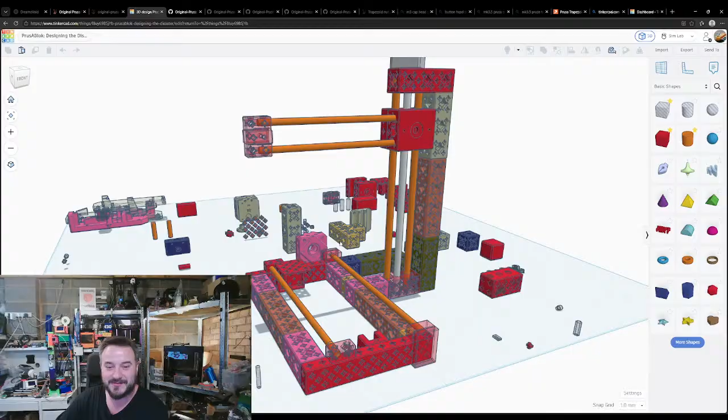Transition. There we go. Yes, there we go. So we did, as you said, horrible things. We now have something that resembles a Z carriage that should hold

also the X carriage, an X carriage end piece, and yes, it might not sound like much, but it's a reasonable amount.

Did I copy this and put it over there? No, I didn't. Let's put one over there.

So, we have got, in order of pieces, X carriage end, Z carriage front, rear, the Z top, the Z base,

a simple rod holder, a fancy rod holder, a Y motor mount, a Y idler, and a Y front and rear plate.

Those are the pieces that we've got, I think.

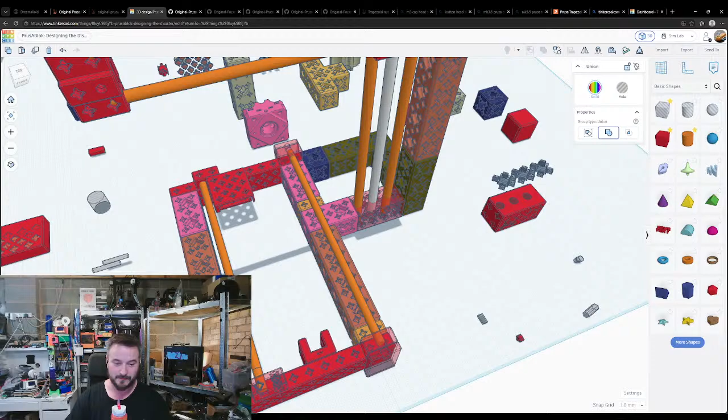It's warm. I don't like how warm it is, but it's warm. And on that note, don't forget to drink things when it's warm. Just don't forget to drink things. Or itch your nose, because my nose is itchy.

Your nose, not my nose. Okay? Okay?

Right. Yeah, I think we can jinx it and say, you know what, Thursday we can be printing things. Let's jinx it and say that.

I mean, to be fair, we could take the Y front and rear, print that.

The Y idler, the one I printed was incorrect, because let's make this mistake now and get it over and done with.

The Y idler, I didn't put the backing piece, the backstop in. So the hex nut will just fall through. Do I have a right-sized hex nut?

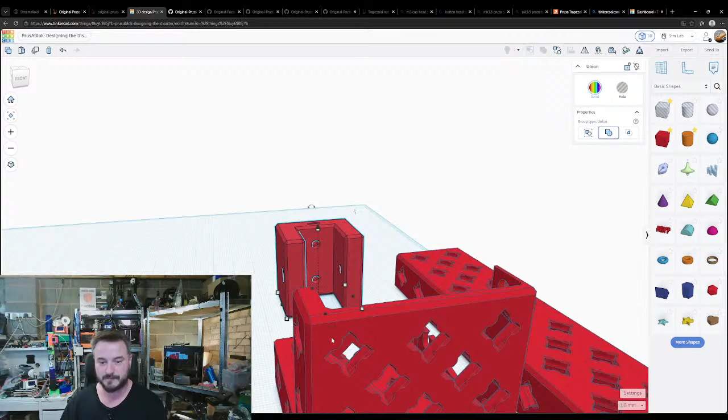So should we do that now? Shall we jinx ourselves and print the Y carriage pieces?

Yeah, I think we should do it. Let's do it. Let's do it.

Let's load up Prusa Slicer. And then let's transition so that y'all can see it too.

That is the wrong version of Prusa Slicer.

Let's try this version. For some reason, it loaded up 2.1. That's really old. I don't know how old 2.1 is, but that seems really old.

So let us load up Prusa Slicer.

And then let's do transform, fit to screen. Somewhere about there. Okay.

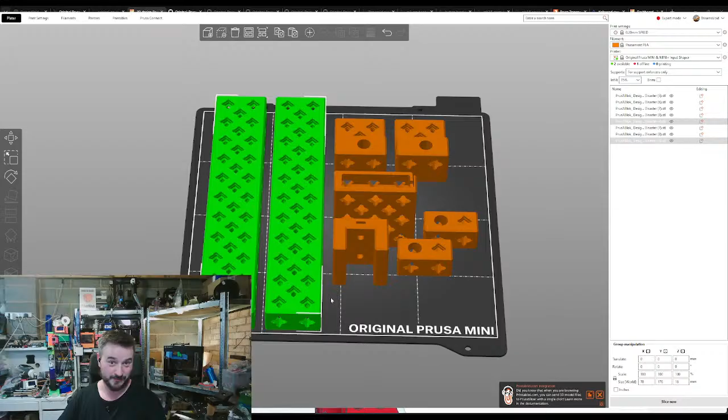In theory, this is the y-axis. In theory, we could slice this and it would be ready for Tuesday.

Let's see how long it takes. Let's take a gander. Viduko, hello. How are you doing?

Trying to install Debian on an old laptop to see how I like it over Mint. They are the same base, it all depends on how much polish you want on top.

10 hours, 10 and a half hours for this print.

Do we do it? 10 and a half hours. We'll have it for Tuesday.

I mean, to be fair, we don't need 10% infill. We do need 0.2, I like 2 layers. Go 3 shells, top and bottom. 3 shells, top and bottom, 10% infill. Not in grid, let's go adaptive, no, generic cubic.

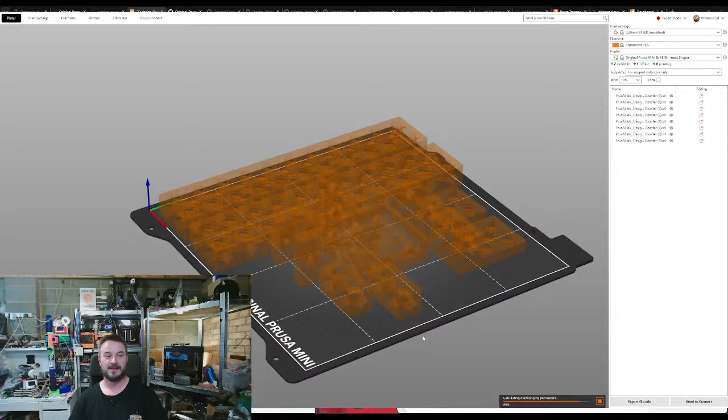I got mine in 2013, 2014, 4th gen i7. Annoyingly, it still works, annoyingly it still does reasonably well, to the point where I've rebuilt the 4th gen i7, and that is what is powering this live stream right now.

In fact, the same graphics card, an NVIDIA GTX 1050 Ti, and it's all doing this. Yes, it's currently running at 80 degrees, but hey, I'll tell you what.

I do not love downloading OS files from the internet. I'm going to have to see how difficult it is keeping a full offline ISO on hand, just in case civilization totally fails. That is a very reasonable approach, having Ventoy on a USB stick and a bunch of Linux ISOs. I mean, you can even do Windows within Ventoy to install that.

Do we do it? Can we add a brim? Can we add a brim in Prusa Slicer to just those objects?

Right, actually let's just select: Y idler, Y motor block, fancy rod holder - I guess I can't escape Linux talk even on others' streams. No, you can't. Simple rod holder, 11 by 2 block, fancy rod holder 2, simple rod holder 2, and then 11 by 2 block 2.

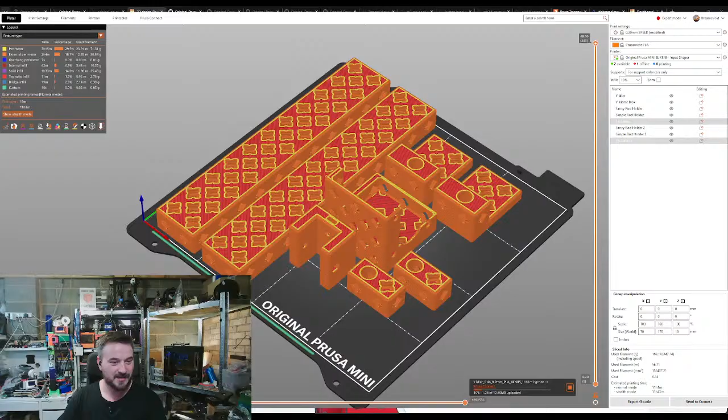And let's just do the do. Boom, there's the Prusa Mini, or what will be the PrusABlok. Let's just send it.

Downloading the G-code. No, I don't want to update, go away, don't make me update right now. Can I not skip?

There we are. Don't you love to see it? Don't you love it when your 3D printer prints parts for itself?

We'll check back in on that shortly. Did I actually orientate the motor block correctly? Yeah, that's fine, that's fine.

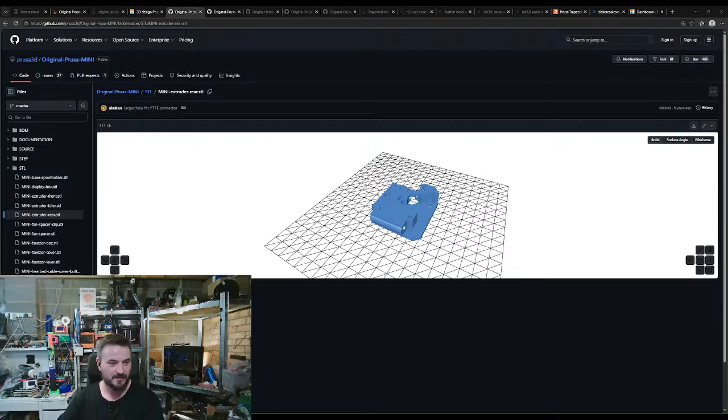I made the thumbnail, you know, this thing.

I broke the shot. Good job. For goodness sake. Yeah. Right, transition.

Right, back we go. I made the thumbnail in Photopea. It works. Just so I had the chop across thing, because I couldn't figure out initially within GIMP. I used GIMP previously, but I couldn't figure it out. And then just the text overlays, I do that on my phone. I hate that that's the answer I've got, but yeah.

All jokes aside, it seems like a fine OS. It just doesn't run hardly anything I use on a daily basis.

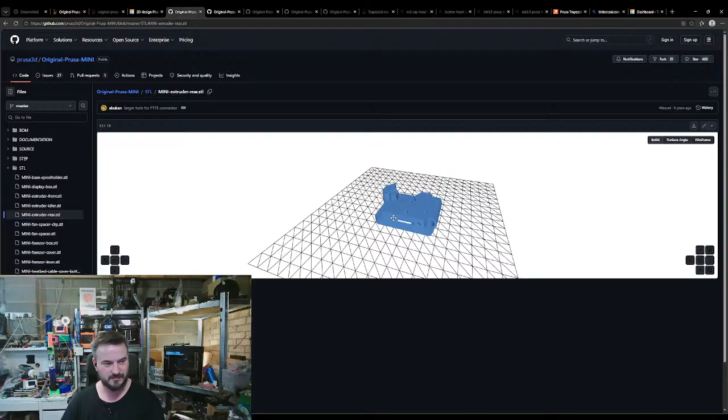Currently, it's an opt-in feature, but yeah. What did I say that you're agreeing with?

Move you there, move you there. Drag and drop, and align, align. Because...

Which side holds the NEMA 17? Which side holds the actual extruder? Oh no, I didn't mean to close you. I meant to duplicate and then go into Tinkercad.

So I can load up the pre-built model. Actually, why am I doing that? Why don't I just use the manual? Right, let's just use the manual, the manual makes sense. Right, you finish loading. Cool.

Extruder motor parts preparation, assembling the extruder. Extruder assembly parts preparation. That's the idler. Extruder front parts preparation. Okay.

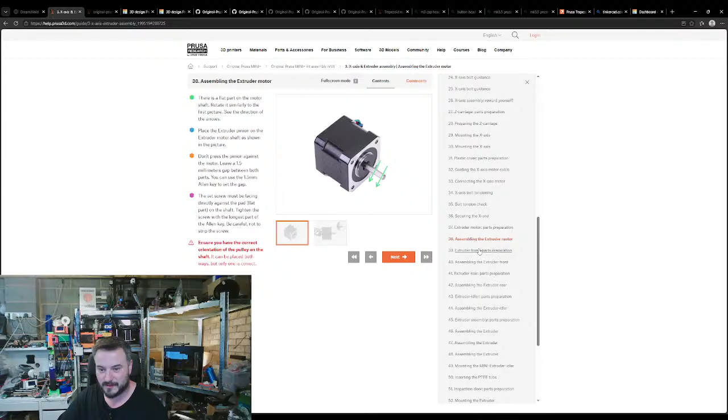So if that's the extruder front, extruder idler, assembling the extruder. Right. So is that extruder front? If extruder front holds the NEMA, then where's extruder rear?

Tinkercad, man, can you import a PNG as a reference image? Blender lets you. No. SVG? I can import an SVG.

Thing is, though, I'm trying to... You're not done, Slowpoke, Cragord. You've only just turned up. You're half an hour late.

And then place the bearings onto. So if that's... what part is that part? Mini extruder front, it says it right there. So I need mini extruder rear. So that's mini extruder front, that's mini extruder rear.

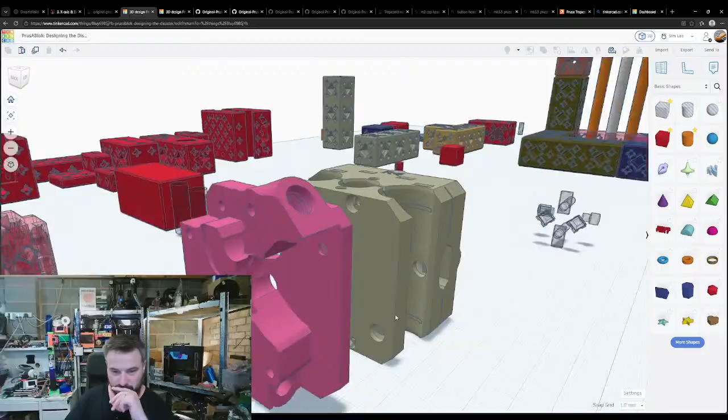You align centrally with this, please. Oh, hang on, that's upside down. There we go. That's not fair. Happy she kicks and bites. I mean...

Anyway, so extruder rear, that sits on there. And then extruder front sits on there. And then, oh yeah, that's the cable management piece. And then extruder idler.

I'm not echoing. I don't think I can echo that one, Joe. I don't think I can. Or should I say, I don't think I should? You know what, that crossed the line. No, it didn't cross the line. It's fine, it's fine, I'm just being safe for work, even though it's currently Thursday and it's past work hours for people.

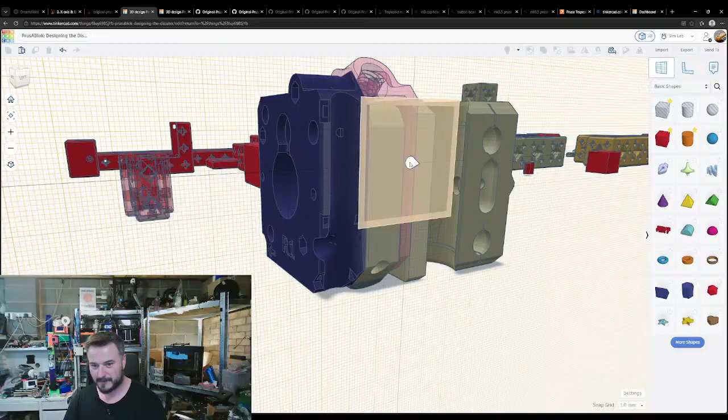Okay, so if that's roughly the stock extruder assembly, right? Can we agree? Do we agree? Roughly the stock extruder assembly, sans all the motors and gears and what have you. What do we think? It looks about right. Kind of, mostly.

Because I've got a genius idea, and you're going to love this. I think you're all going to enjoy this quite a lot. I think, to be brute, I think, and hear me out on this, I think that I can't be asked. I cannot be bothered to remake it entirely.

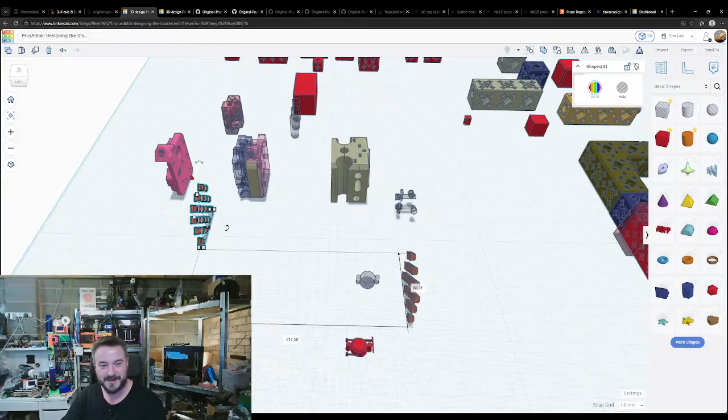However, we can take this piece and do something clever, because there's a nice flat surface here that we can see. And I think that we can just take the pile of connectors that's here. We can shuffle it over here. We can...

Rotate, get confused as to where they came from. And then just do a little bit of that, a little bit of that, and be done with it. Because why break what supposedly works, you know? Why break it?

Because, not being funny, the idea of remaking all of that geometry just doesn't seem like fun. But what we can do is thicken up this plate, thicken it up a little bit. Yeah, just add a bit more girth to make sure that we're not protruding the connectors through.

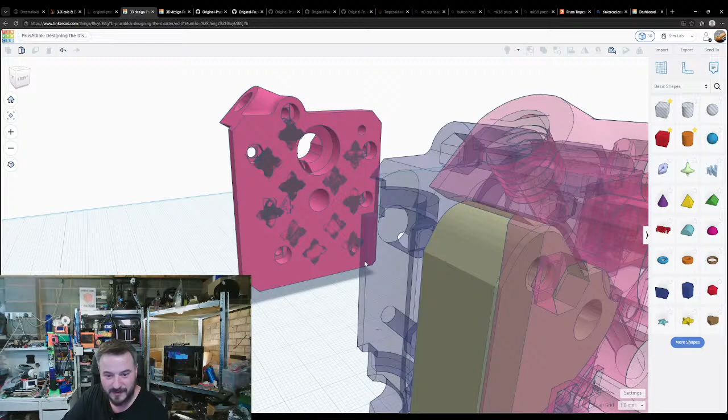And yeah, that'll work, that will work. Just take the ones that impede on the major or vital geometry. And yeah, just be done with it. There's sufficient connectors there. There's 3, 2, 4, 7, there's 10.

So that piece, Joe, is Mini Extruder rear. Mini Extruder rear. Because, you know, do I feel like I'm cheating? A little bit. However, remember rule number 7: have fun.

Is this cheating? Because then, you know, we merge this all together. And then we just ba-doop, ba-doop. There you go.

Just make sure it aligns somewhere, like that. Okay, maybe not, let's see, maybe not those ones. Maybe these ones, those connectors. That'd work, it's not impeding, it's got sufficient.

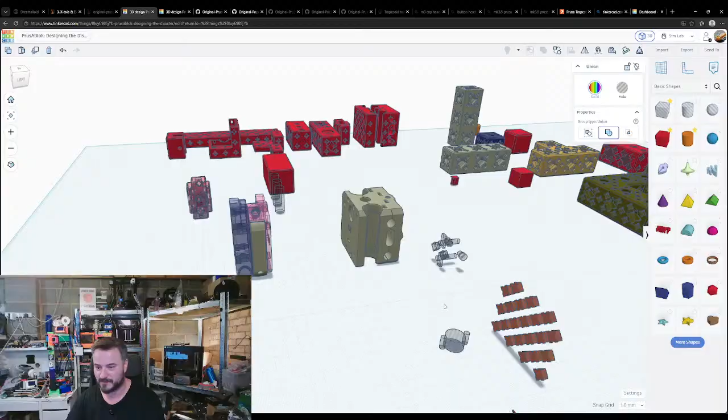I mean, these connector holes that I've been referencing are 5 point something. They are 4.88. So if that back piece, Joe, if that back piece was 5 mil thick, like just extrude it out to 5 mil, then I think it'll be fine.

I mean, hang on a second, can I do that? How big are we talking? We're talking 53, 53 by 68, 67.8. And then thickness doesn't matter.

Loop, loop, move you there, duplicate. And then align. Right, let me just go through what I'm thinking. If it was 6, but the holes were still fine, if it was 6 mil thick in total, based on the screw holes, I think that would work.

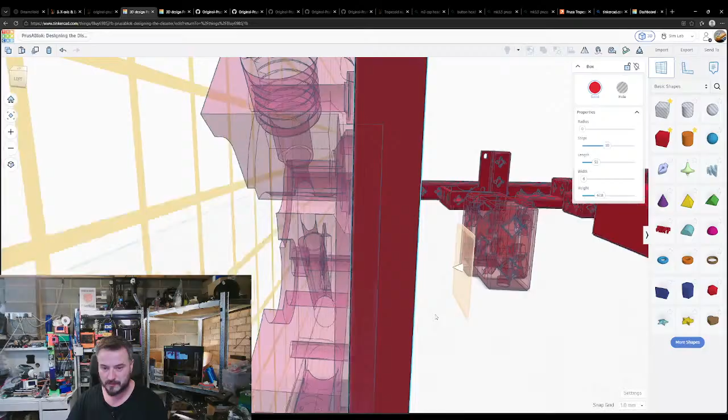Because my other thought was, well, let's just use that object as a, what do they call it when we're grouping? We've got not a uniform, a Boolean, a bundle, a union, an intersect. So then you cut out the plate and then add it on top of the plate after the fact to thicken it up that way.

Something along those lines. So now we've got all the holes, and now it's just a bit deeper. I didn't even think of that. That's pretty cool.

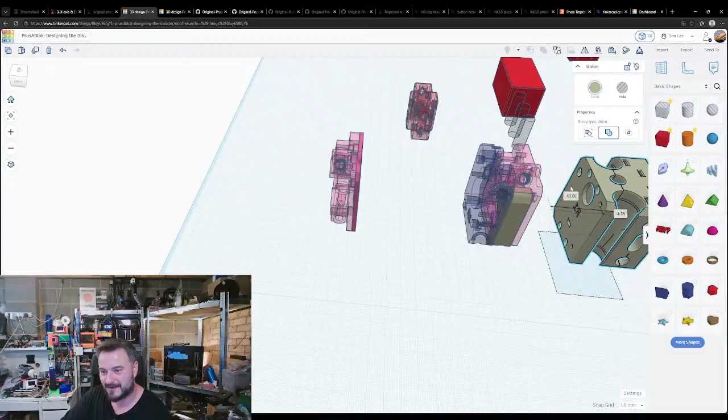Okay, so Joe has just modified it in Blender, which means let's see what Joe made. Bring it in. And let's just compare it to what we made in Tinkercad with the intersect modifier. Hello, where'd you go? There it is.

So we rotate and we rotate to get it in the right orientation. And let's make it pink as well, that's a grayish pink, I'll do. Drop it to the same level and align it so we can compare.

Yeah, it's achieved the same thing. It's just Joe's is a lot cleaner because, yeah.

Huh, actually your solution is surprisingly elegant as well. Love it, thank you. Again, the whole intersect and union group and bundle group thing, the different types of grouping is new. Since we started this project, I didn't know it was a thing.

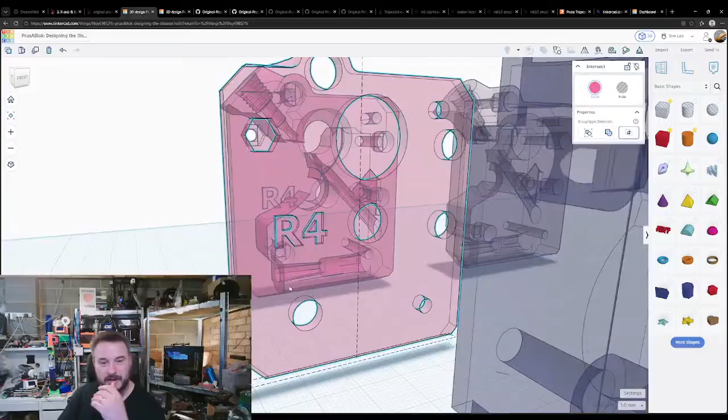But the thing I was just thinking, yes, we have to be careful with screw lengths, but if we did an add-on plate, we wouldn't need to reprint the whole extruder assembly. We could just print this add-on plate full of connector holes that's the right size, that aligns us correctly up here.

And then, this is where it gets great, any extruder upgrade that's made for the Prusa Mini, so we're talking the Bondtech BMG extruders that use the same mounting holes, we can upgrade to that. We just keep our add-on plate, we're referencing existing pieces, plonk, like we do for the extruder, for the motors in general.

So so long as we keep it... So the downside is the add-on plate would need to be thick enough to catch all the connectors, making the total a little thicker, but it might work. Yeah, that's a good point.

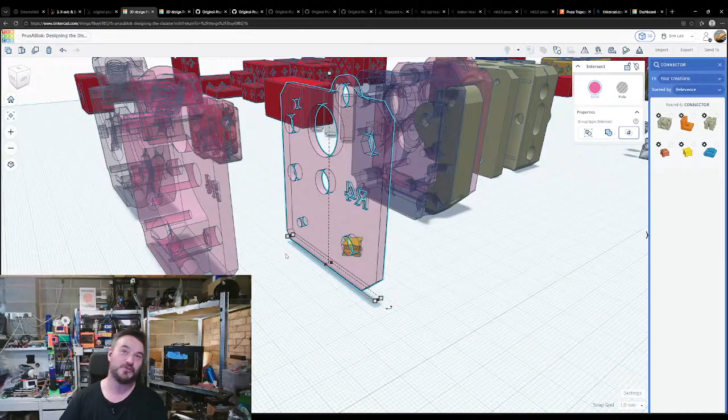It's a specialized plate that can then be used to adapt to any replacement extruder for the Prusa Mini to any PrusABlok printer at that point.

To be fair, you can use the regular holes with the 4.4. They'll stick out the back a little bit, but the connectors will only go in one way. Well, we only need the connectors to go in one way anyway.

So, what do we need to do? Right, I'm going to duplicate this piece. Give me another. Right, you go over there. Let's ungroup you for a moment. And let's be a little bit more clever. Let's go for the total thickness of the back.

So then we are catching the screws. So let's go for intersect group. So that gives us 4mm. So let's just bump that to 4.4.

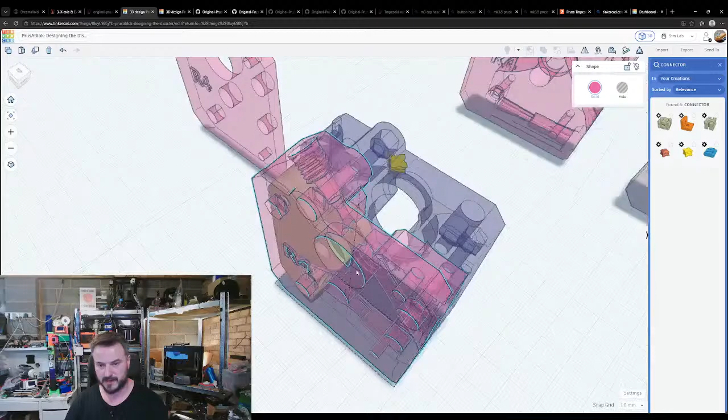So the cap head screws that get used to pull the pieces together. Is that backwards? No, it's not backwards, it's just misaligned. Bup, bup, bup, bup, bup, bup.

There, okay, so we just need to grab it in some capacity. The extra space on the connector hole is just the space that will be bridging on the top. Inside the hole doesn't sag to the connector. Right. The extra space on the connector is just hole space, so that when you do bridging on the top, the inside of the hole doesn't sag into the connector space. Okay, so that's what that is.

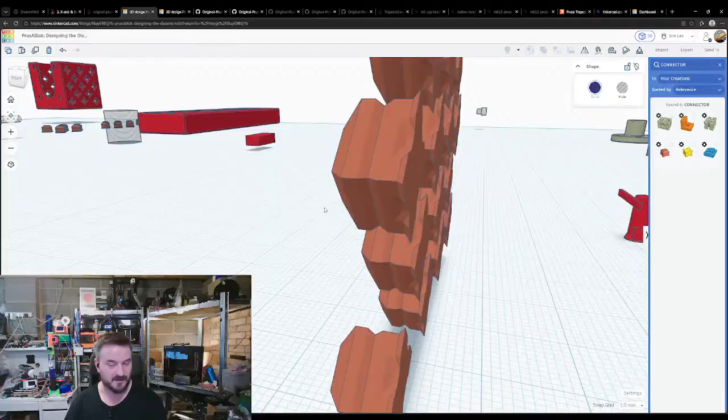You're referring to this lid piece, I'm calling it the lid. It's the top of the connector, that's there to bridge so as to decrease the amount of bridging that's required. What I'm saying is don't use the plate connector, just the regular connector and let it poke through. Sure, I mean, so long as we get to that point, we're fine.

Right, let's go back to this a moment. So really, it needs to be thick enough that it gets sufficient purchase from something. The connectors themselves are 8.8 mil thick, yeah. I should have made that more standard, but too late now.

Yeah, if you did any major changes to PrusABlok now, it would be a breaking change. And then just not fun to have to go through and reprint everything.

Right. So the thing I'm thinking of right now is, does it need to be thick enough to catch these cap head screws? But at the same time, if it catches the cap head screws, are there sufficient screws in the kit that are long enough to account for the extra 4 or 4.4 mil of material we're adding?

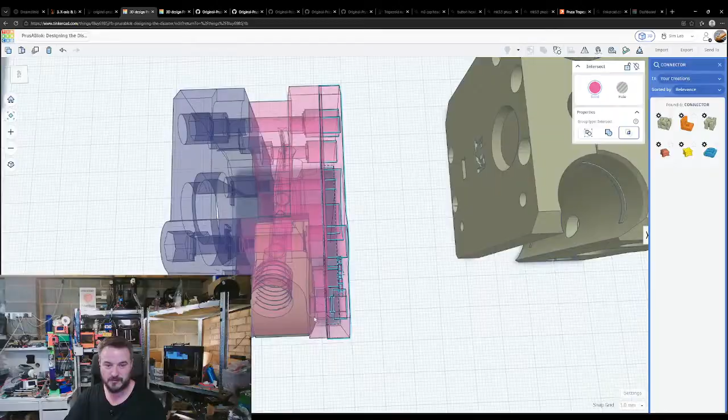Are we okay just catching a single nut at this point? Or do we just reprint the whole back panel? Do we just make it a bit thicker and reprint the whole extruder rear? Is that something we should do instead?

Because having a whole extruder plate, having a whole plate system where we can take any extruder assembly for the Prusa Mini and bring that into PrusABlok is great. However, it feels like I'm potentially screwing myself over when it comes to reusing the Prusa Mini kit.

Because again, yes, we've now got nearly all of the screws in the kit that we can make use of, but then we need to go through the kit and find them and pull them out. Whereas if we're just using the kit part for the extruder assembly with the screws that are in that bag, we can say, hey, just print this different piece instead with the PrusABlok connectors on the back, and you're fine. I just feel like we're screwing ourselves over for no reason.

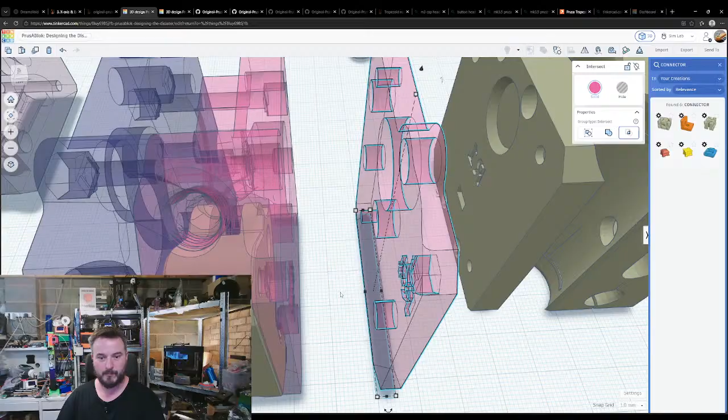I think we go for the slightly thicker option. We just go slightly thicker. So let's bring this back. Wait, yeah, that - bring it back, align it up with this piece. There we go. And let's fill in the R4 like Joe did, because that makes sense, actually.

So we need a standard block. Nope, not import - basic shapes, cube. Moment of crisis over, folks. We figured it out. We're going to keep it stock - well, not stock, we're going to make it slightly thicker.

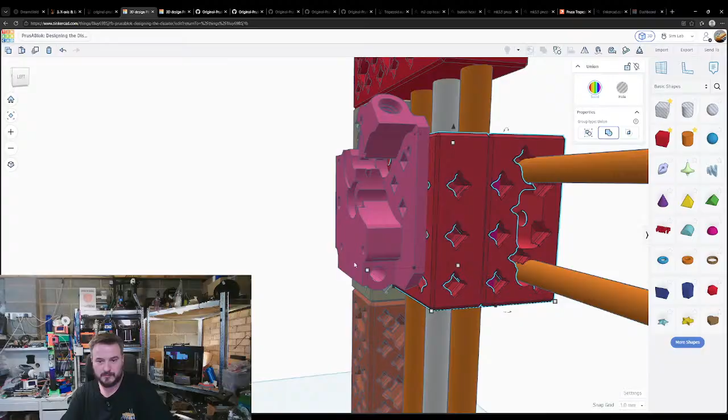Make it bigger. So you say make it bigger to actually match up with the Z carriage? Is that what you mean, Cragwood? Because, I mean, yeah, we could do. We could do.

I'm going to do this one first. Group it. Not a bundle, a union, a group. Which one's the stock one? Bundle, group, new - union, group, formerly just group. Bundle. Union.

Oh wait, whoops. Make you slightly narrower. Doot, doot. Convert it to... No! No! I'm not converting it to a Bambu hot end. I'm putting a Revo on it, because I'm lazy. Oh wait, I say I'm lazy, and what am I doing? I'm making a bad Cragord. Exactly, you tell him, Professor. You tell him.

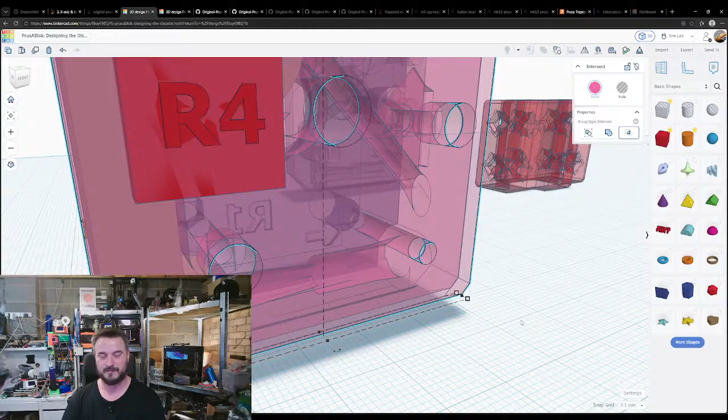Again, the actual hot end piece, I'm not touching because it works. There's no point PrusaBlockifying the actual hot end.

As I remember to drink, and then it turns out I'm an hour in and I've almost run out. Right, let's take you - duplicate. Does it really? I mean, it works enough. We can see that it currently works - it's printing all the pieces to PrusaBlockify itself out of PLA. It's currently doing PLA. Is there any point in doing PETG? No.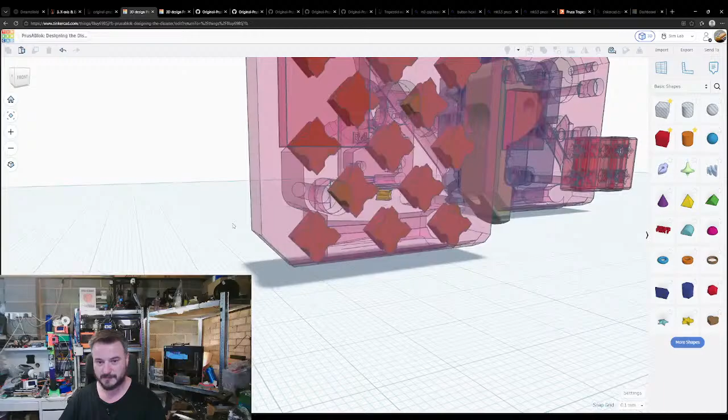That makes sense, that makes sense. How are you dealing with the weather, Raj? British hot, 75 Fahrenheit. Screw you. Screw you, Ace. Oh jeez, it is supposedly cooling down over the next 4 days. I don't believe it. Wanted to stir the pot. Yeah.

It's not telling me, I'm okay. I have the AC on at the moment. Show off. It's not telling me the weather in Fahrenheit. It is 24 Celsius, feels like 24 Celsius, and 24 Celsius right now is currently... it's not telling me in Fahrenheit, it's not telling me in silly units. 24 C in F, 75. Yeah, you were actually right, Ace. It is actually 75.

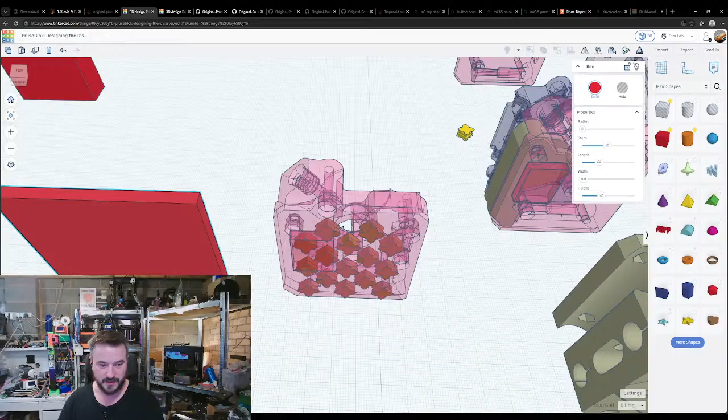Right, let's do this silly ways. Let's do 64 by 72? Is it 72? 64 by 72 by 4.4. And then we rotate it to be there. We then go plonk, plonk, plonk, plonk, plonk.

Wait. Honestly, anything over 100 is just hot. Exactly, I agree with Fahrenheit from the perspective of if you treat temperature as a percentage. So 99% hot, or 75% hot, or 4% hot. 4% hot is actually really rather cold. You know, 0% hot is freezing, 100% hot is hot.

Fahrenheit makes sense for humans, Celsius makes sense for science. Yeah, but that's why science invented Kelvin. I mean, I don't know who Kelvin was before they invented him, but I have no clue. AC is at a nice temperature. Yeah.

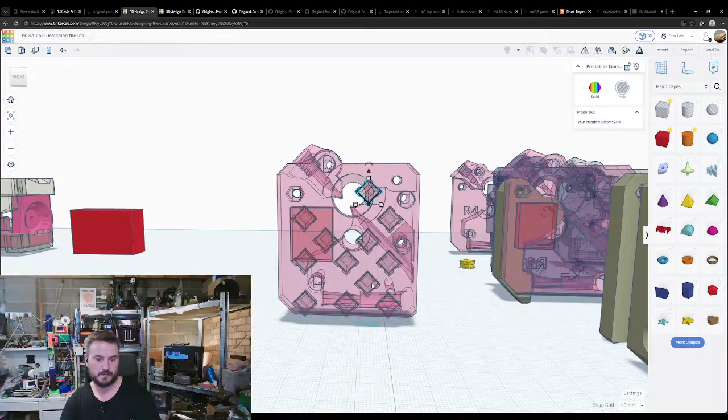Oh wait, I'm still at 0.1, 1 millimeter. 1, 2, 1, 1, 2, 3, 4. Yeah. No. Up 1, across 1. No. No, 1. I can't do maths right now. 1, 2. 1, 2, 3, 4. 1, 2. 1, 2, 3, 4. No. 1.

No. And then we go... maybe there. Yes, we can put one there. Bonus points. We have a few good days of good weather, and then there is a ban.

Yeah, we are going to have a hosepipe ban, probably. But at the same time, it's not currently active. I think once I've done the stream tonight, while I wash the pots, it'll be close to midnight or 1 o'clock, so I'll put the hosepipe on then and soak the lawn when it's cold. The issue is people irrigate during the middle of the day when it's hot, which makes no sense. Doing it at night when it's cold makes more sense, because people are silly.

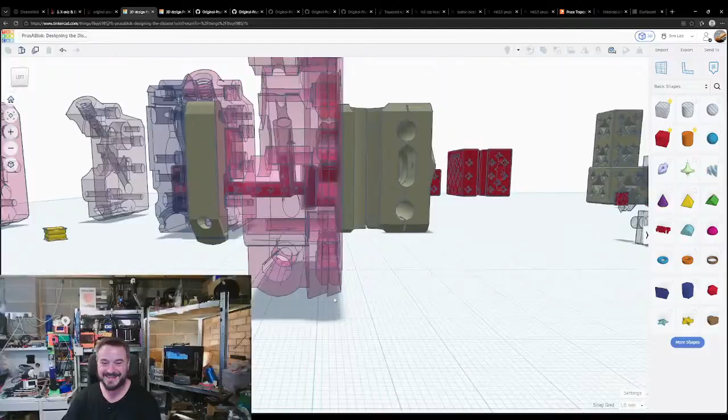Yeah, there's a weird bit of lippage. But that just adds character, that just adds character. That's fine. So then we take this...

Move a copy over here with the rest of the pile. Get rid of this version because... yeah. And then let's align it.

Align it with this up here, in the middle-ish... I said in the middle-ish, and on the face. And then we focus over there, make that not translucent. Bang, done.

Actually, I do need it to be translucent so that we can actually see where it aligns. Where do you actually align? Do you align there? Yeah, it aligns there.

So the bonus one we put up top fits. So we've got one, two, three, four, five, six, seven, eight, nine connectors. So yeah.

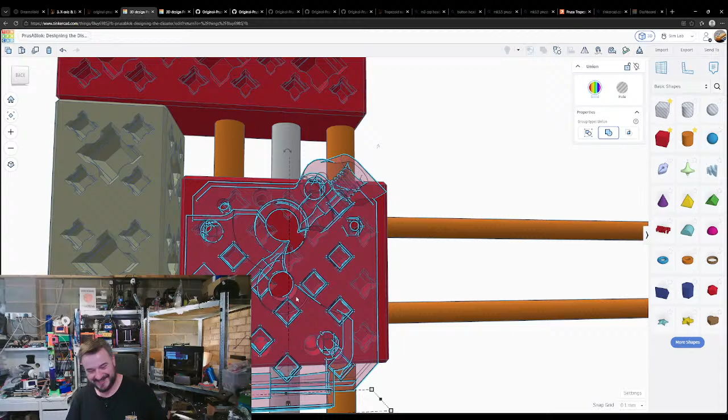And there I get cancelled. Well, nice entertaining you folks. Yeah.

I'm happy with that, that mostly lines up. Yeah, it looks daft, but oh well. So that's the extruder done.

Are we calling that one done? Or are we going to have to come back to that one at a later date and revisit it? I feel like you're going to make me revisit this one and do it again properly.

Dude, totally aside, in the new Spider-Man, he makes a quote advanced fabrication device. It's just a sewing machine with an upside-down Ender hot end and fan.

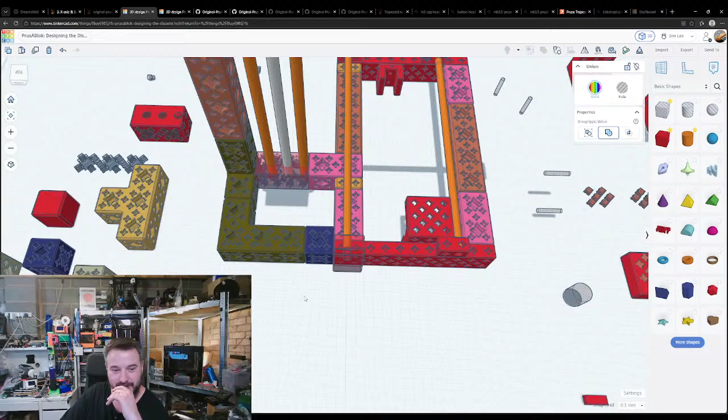And I'm going to do the same trick again. Before I do, that's now in, and I guess it gets printed in this orientation. Drop it.

X carriage is there, so we can move that into the prototype area. Right, you move. You lot move. You move. Move. No. I said move. And you.

Let's import the display, MIDI display box. 112 by 64 by 30. Oh, it's so close. Wait, hang on. 112 by 60... so 64.61. 64 is a PrusaBlok number. 80 is a PrusaBlok number. 112 is a PrusaBlok number. These dimensions are PrusaBlok numbers.

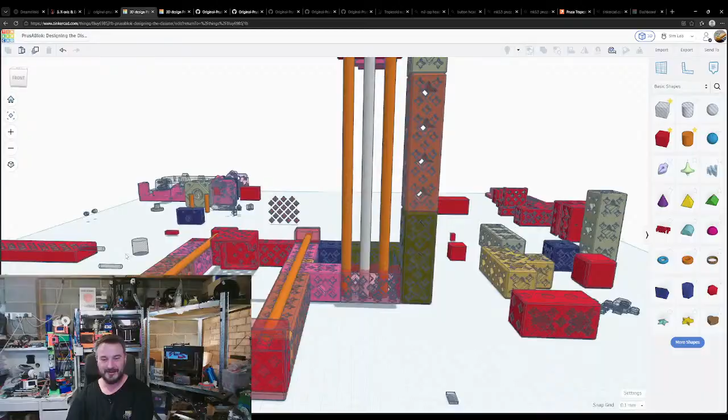It's already there. Professor, it's already there. It's already got PrusaBlok numbers on it. So how far off are we? Come on, display box. Holy smokes, it's like it was made for print. Yes. Where's the display box?

So we're talking 64 wide, but that 64 is this ratchety thing, which I haven't got. But the 112, that's fine. But again, this ratchety bit - I'm going to have to steal the ratchety thing, aren't I?

See, that's why I made a nice standard size, and not 42 like the other organizer's system. Exactly. Right, who's ready for some cheating? Are we going to cheat it again? I think we're going to cheat it again. It smells like burned wires. No, it just smells like warm.

Right. Duplicate. No, duplicate. And move you back into the pile. Grab you.

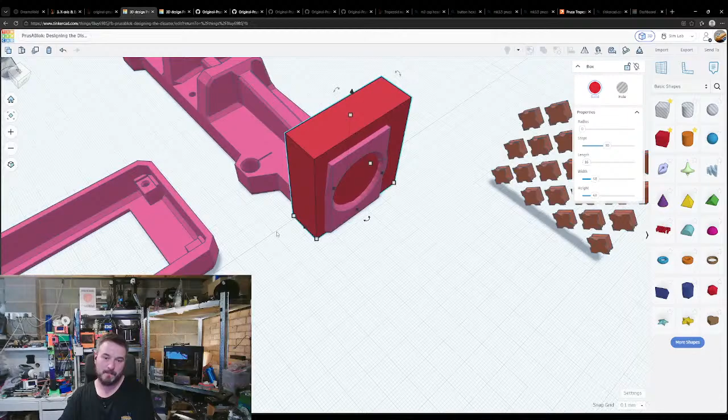So you know, the thing that we've discovered in this session, the whole - what is it, union group? No, intersection. Yeah, we just steal it. We just steal the geometry.

So how far do we need to go? We need to go to 18. Okay, well, fine, let's go to 18. We can work with that. Actually, no, we don't need to. We don't, go away, go away, go away. We don't need to, because it's the hex hole, it's the nut hole, it's fine. Thing we learned: Doug has a brain and can do math. Hey, it's Joe's system, it's fine. Okay.

Something like that. So we steal it. We steal it. Intersection. Intersect. Boom. Right, we've got the intersection. Now we can duplicate it.

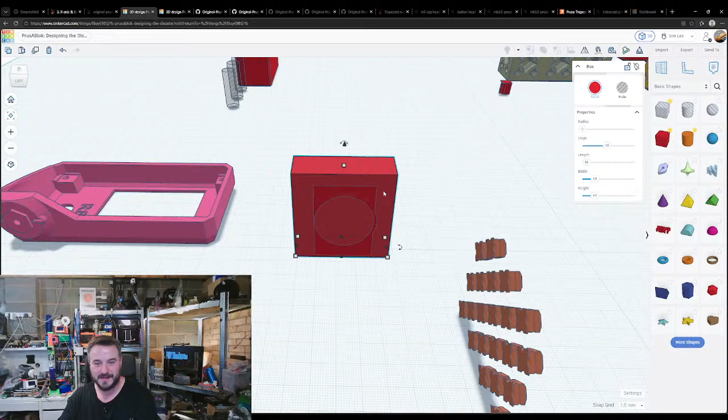Undo that one, get rid of that. And then we need to do it again, but the other way around. How do we do this? We need to do it the other way around. So we need to do a, what is it? We need to turn this into a hole and then put it in the middle.

Stealing isn't bad, I say stealing isn't bad. Stealing's only bad when you don't have permission. And considering Prusa put this as open source, it's fine.

I know this is apropos of nothing, but this is a shining - apropos of nothing, but the shrink wrap modifier in Blender is the balls.

I want to know how you would approach this, because I want to make the inverse of that geometry. And I'm trying to think how I can do it. Because 48, 48, and 16 - I want the inverse of the geometry, but I don't want everything else that goes along with it. So am I going to have to intersect again? Because yeah, I don't want everything else. I just want... whoop.

I just want this cutout shape here, and I don't know how to get just that cutout shape. Because I need the knurling - not the knurling, I need the ribs. And I need the ribs so that we've got something for it to bite into. So how can I get just the ribs?

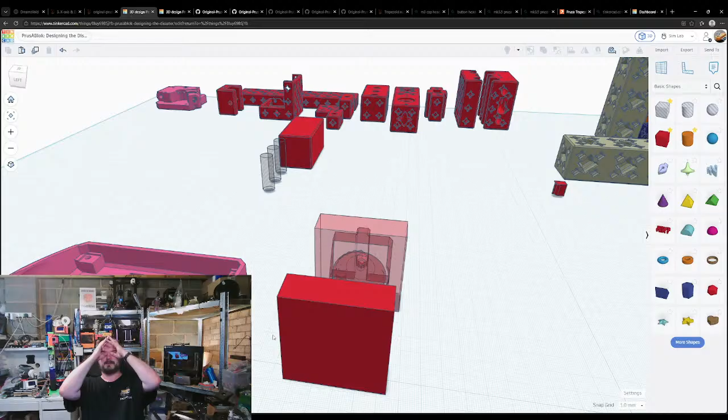I would extract that in Blender for you. Well, I could extract that in Blender for you pretty easy. Right, but how can I do that in Tinkercad? How can I extract that piece within Tinkercad? Because we know we can do an intersection now. Right? We know we can do an intersection. We know that we can make a cutout.

Theoretically, you can put a block over and cover exactly and turn it into a hole and Boolean them together. Wouldn't that work? Yes, it would work, but then there was all the debris left behind. So I'm wondering if I do that group intersection now. No, I've still got the same geometry piece. I want the inverse of it.

How can I do this? How can I do this? What's the exact size? 34.15. 34.15. And then it's, well, yeah, it's 16 because we know it's 16, and then it's 41.95 tall, so let's do 41.95. Okay, let's do that, do that, do that.

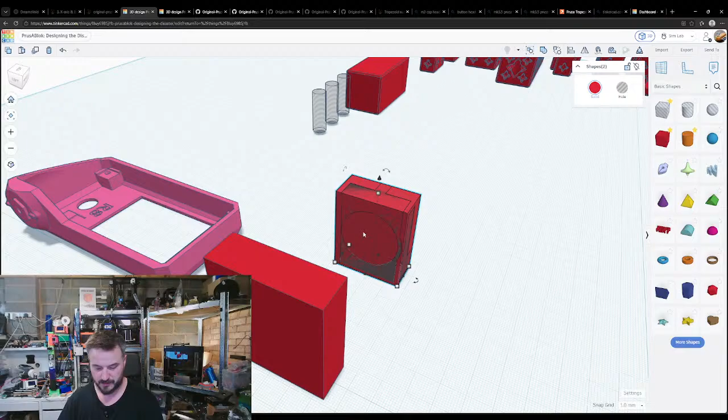And then take the piece in the middle. Move it out of the way a second. Turn you into a hole. Take the piece and then group it. We've still got a lot of mess, but we can work on this now.

Yeah, I just need to extract the juicy bit in the middle. I need to extract the juicy center. Let's go to flat view, and let's try something new, the scribble tool. You want to get rid of this and get rid of this.

I realized that I could have just made 2 squares, and it would have been a lot quicker. But then I wouldn't get to make silly noises like nit, nit, nit, nit.

And then I think that... Okay, done. Okay, okay, okay, right, rotate. Nit, nit, make it slightly wider.

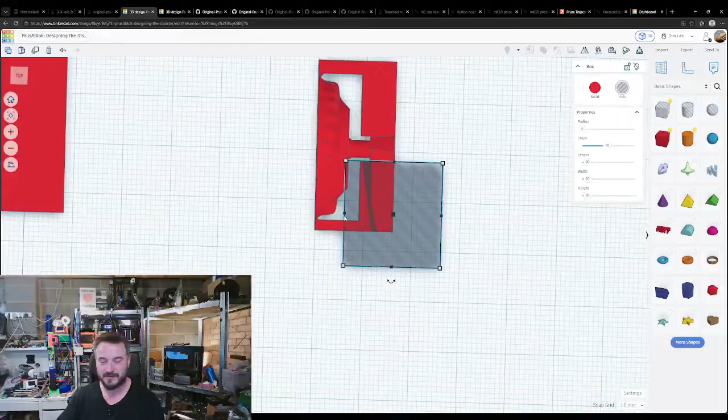Ooh, really? Hold on a second. No, I didn't, never mind. Sorry, the thought I had there was, hang on a second, did it just magically separate that for me? Wait a second. Oh, Doug, you silly weirdo.

Right, you know what, export this. Export it, go into the slicer. Let's... Oh, have I done it? Have I come up with a brilliant idea? Let's change the view so you can see the slicer. That's window number 4. Where is it? That one. That one, transition, right.

No, Doug, you're not silly. This Doug is silly.

Get ready. Cut. Cut position 0.1, right? We want object A, we don't want object B. Perform cut. And then we split to objects, we move that piece out of the way, get rid of it, and then export as STL. There we go. We extracted the geometry. We did it, we got the piece.

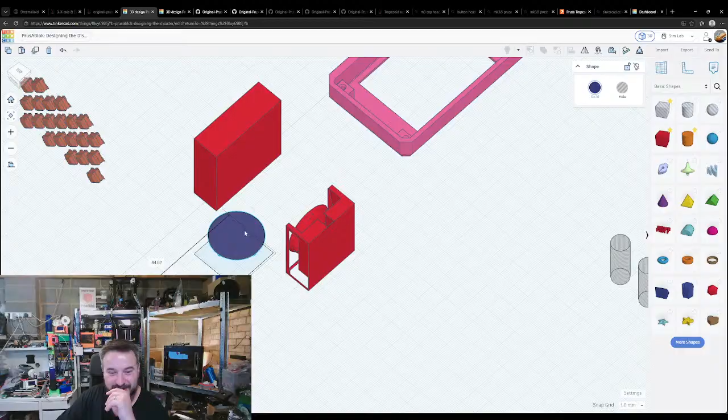There we go, when it imports. Low key, not sure what just happened. You think I'm sure what just happened? I just pulled the key reference thing, the bit that Prusa uses for positioning the screen.

To be fair, in Fusion 360, I think the right answer would have been to just remodel the whole thing. I mean, people probably would have just done that. But I don't... I mean, yeah, I feel like I've lost 3 layers of detail in doing this. But I don't know, I don't know how to make those bumps.

To be fair, we don't have... there's nothing at the moment in Tinkercad, in PrusABlok, to get multiple adjustment points. Now, I could have tried to make a ratcheting system, I could have tried to do that. But then, you know, this piece of geometry works. We know it works. And if I'm keeping the aesthetic and functionality of the Prusa Mini, but in PrusABlok form, then keeping that original feel of the Prusa Mini display makes sense. The articulated spinning blocks kind of have that because it's print in place. It needs to have really big clearance so it doesn't work great.

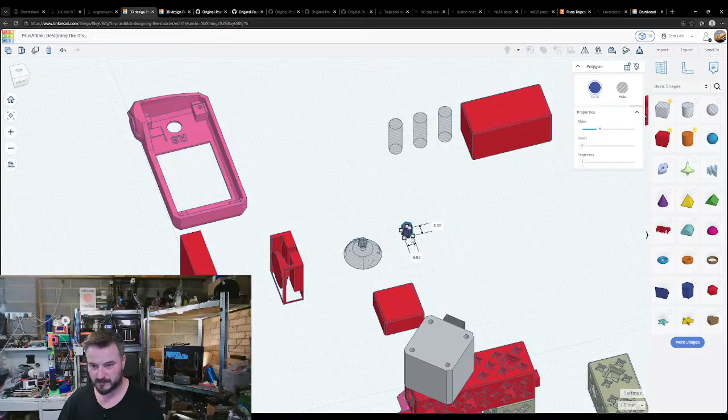And then focus in on the 1mm hole. Place you there.

The non-smooth articulated blocks, like the 195 octo swivel, 193 swivel, or 143 rotary swivel, all have internal ratchets designed to make them rub against the walls.

Do I have that block downloaded? I don't have, for some silly reason, the Ultimate Kickstarter bundle downloaded on this computer right now. Are you able to send me that so we can have a look? Because if we can do it, why not?

29, 30 degrees, I think, is the rotation for a hexagon. Oh, it needs to be a little bit bigger. 6 point something, 7 will do. 7 will do. Doop, doop. And then go down.

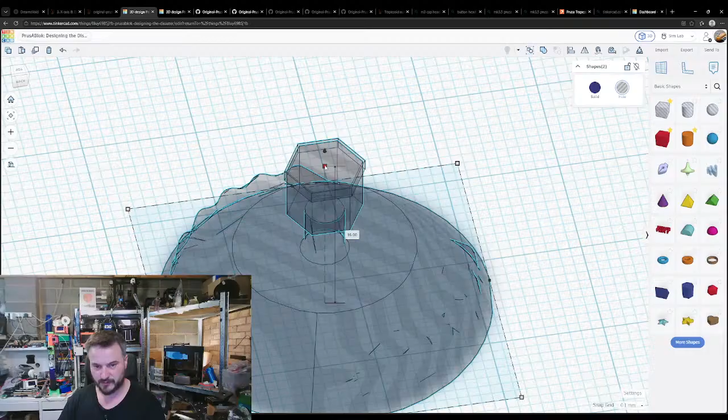Okay, okay, right. Let's: 1, 2, 3, 4, 5, 6, 7, 8, 9. We've got that 0.1 height back. Group it together, that should be 16. Kind of, 1. And now that's 15.9, 16. Group, great, group it.

So then we take this, we get our connector holes from over here, yoink, rotate. Ooh, I'm accidentally moving over to not the testing area. Right, back we go.

Back we go. And then we ungroup these, steal a star shape, so 2 and 2, the one in the middle, so that we've got the center hole, even though it's not going to be of any use. Group hole, align, middle, plonk, plonk, ungroup, delete, no, delete, 1, 2, 3, 4, hole, drop.

Oh, look at that, spare connector, go away. You go in the middle, badoop, badoop, badoop. And then we group you together.

And now we've got the ratchety thing for adding the screen. The stock screen. So we don't need to make a new screen at all. No, I'm not doing that, I want to remake the screen.

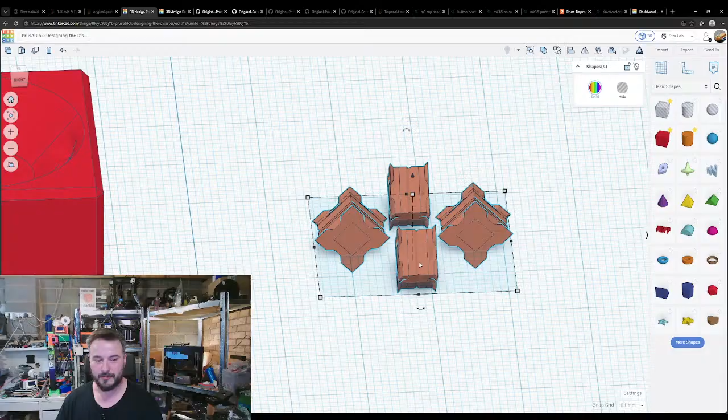And now we can do this. Take one set, plonk it. Take another set, plonk it. Take the third set, plonk it. Take the fourth set, plonk that too.

And then we take the two, take our alignment, center, middle, take the other two and the piece, center, middle, take the whole lot, turn it into a hole, take the piece in the middle again, turn it back into a solid. And then group. And there you go.

Have we got any accidents in here? Nope, looks good to me. Nice, that's another piece that we can print.

Shove you over there. Right. Back to the screen.

What we need is a cutout. 112.86 by 64, but it doesn't really matter. We just take it, shove it in the middle, make it bigger, but then we want it at the right height.

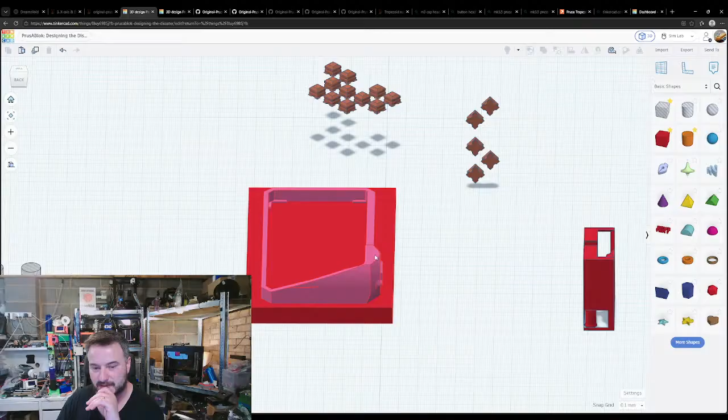So we need to get the right thickness, kind of. But at the same time, do we care? Not particularly. Let's see what happens if we do an intersection here. We want to intersect. That works.

So let's add in one more piece to get, oops, to get the whole corner bit. Intersect. Nope, didn't work.

Ungroup you all, group you, and then we intersect, and in theory are left with the piece that we need. Yes.

We've now got what I think is the inverse. I think, I'm probably wrong. Hold on, I didn't know you could do alignment like that, aligned purely on one object. That's awesome. Yes. So how much of the PrusABlok printer is actually printed?

Wires, hot end, bed, screen, anything else not printed?

Sorry, one second, I need to cough.

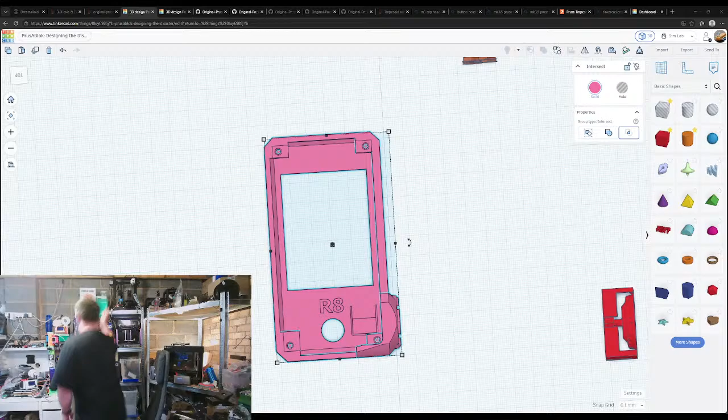I'm thinking next step, how far can it be printed? You can print the bed. In fact, I printed a Prusa Mini bed when I was working on the 180mm PrusABlok printer, the one that used the Prusa Mini bed for the Smurf auction. When I made the charity build for Smurf 2026, I printed out a Prusa Mini bed to have as a reference.

But there's nothing stopping you from using this - and sorry, this is the heated bed, the PCB heated bed. There's nothing stopping you from using this, getting some magnets, gluing it to the back, and then using the steel sheet on top. There's absolutely nothing to stop you from doing that. So, you know, there you go.

It's the heated bed element. You can totally use an unheated bed for PLA - it's fine, just put some painter's tape on the top. But steel sheet still with painter's tape - print that out of PETG or pultruded PET, it's more heat resistant. Like the baby belt - the baby belt uses cotton for the belt. You could print onto cotton with this, or again, painter's tape with this.

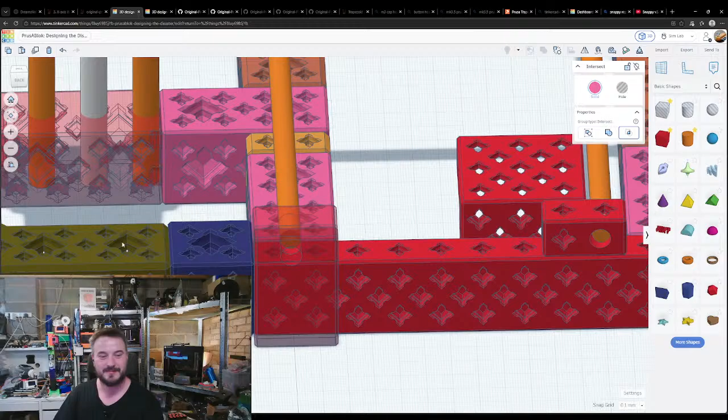Just good feelings about everything, it's great. 20 - come on, step up to 100. I do have an offer from a print farm to borrow their print farm. I don't know if I want to do it or not. I don't know if I want to go that far. Why not? Yeah, why not go that far?

Right, where were we? Screen assembly. I realize that I don't actually need to do an intersection. The bit that I need to steal is...

What I'm hearing is your chicken. I'm not a chicken. Not a chicken, not entirely a chicken. I'm just mostly a chicken. Drop you there, and then let's...

Shuffle you over a bit. And intersection. Got it, there we go. That's the piece we need. Sorted. Oh wait, duplicate and ungroup.

It's okay to be a chicken, just be a good chicken. Okay, I'll be a good chicken. Cluck, cluck. Happy?

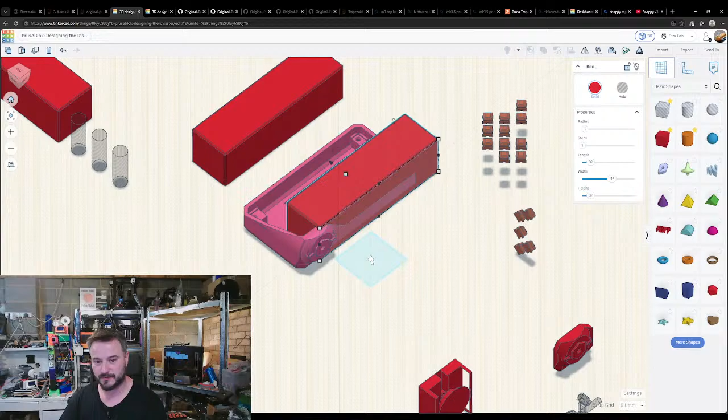Right, so we are talking 112. 112, it's a standard print block number. Rotate, and then we need to duplicate that a moment, and then we need to, not that way, that way, chop off this bit just to find out how big it is. Whole group. Do the dance, Doug. No. No, I don't know how to chicken dance.

So how wide is it? 59, that's basically 64. Basically that's 64. And then height. Duplicate, place it, align it. No, align it. Okay, do the Dougie. I don't know how to Dougie, nobody's ever taught me how to Dougie.

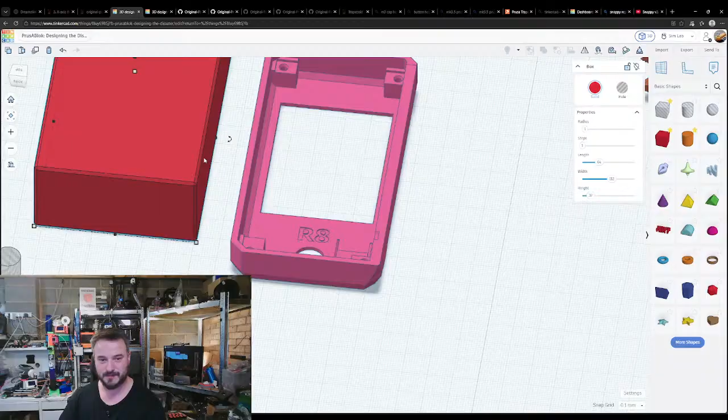Whole group. So now, duplicate. We can do this, floop, floop, and then intersection. Okay, so now we've got the exact right thing. How tall are we? We are 16.1. Do you know what? No, you're not, you're 16. You're 16 millimeters tall, go away.

Make a box that's bigger than the whole thing. Then we go to 0.1, we go down 0.1, group it again. Now it's 16 mil tall. Duplicate, once again. 16 mil tall, no, not there. Here, no, 16 mil tall. Turn you into a hole. Hole, hole.

Then I think we can... I think this will give us what I was after the whole time. The inverse of the screen. Then, once again, 16.

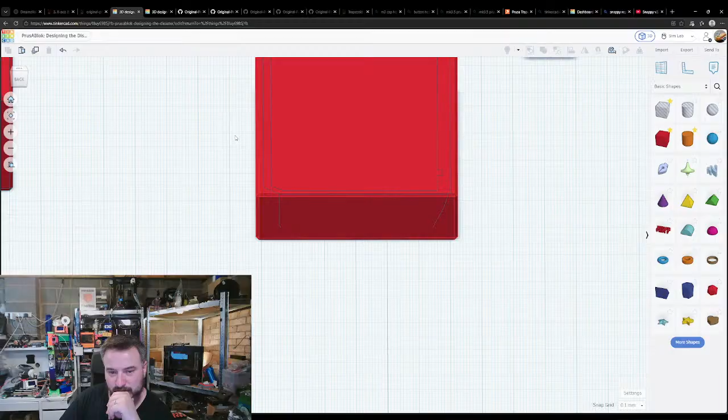I think, I could be wrong, but at this point, we'll do the cutout once again. I've just remade the same thing, that's not what I wanted to do. What was I trying to do? I was trying to get the screw holes, wasn't I? The screw holes in the screen cutout. Why am I trying to do it this way? Oh, I know, because it's getting warm in here. Right.

Electronics. Display.

It's getting to be a balmy 26. No, Ace, actually you're wrong. 33. If we trust the temperature probe on the Construct 3DC1, the garage is currently 33 degrees. Both the hot end and the bed say it's 33. That's a Gerber, that's PCB.

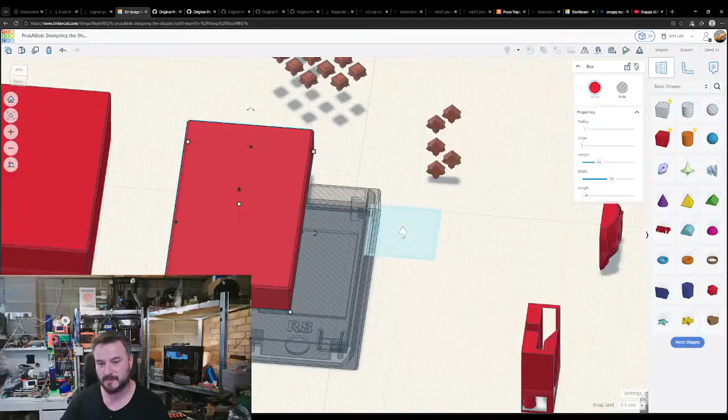In theory. Group it. That's still not the screw holes. Now we group it, now we get screw holes. We get 2 screw holes. So we're in the right place, kind of. Do we get them now? Yes.

That's not what I'm trying to get. I want the inverse of those. Why can I not get... Because, Doug, you've got the pieces the wrong way around. You want a hole for the display and a solid for the thing that you want to be screw holes. So you need to get it the right way around. Solid hole, I think.

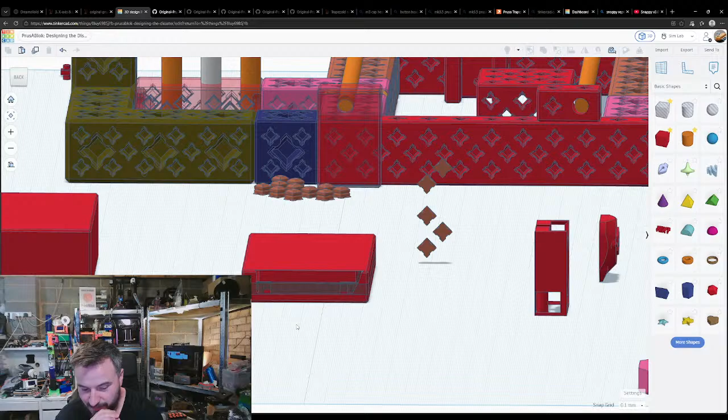Okay, got an idea - you make the table out of blocks. Yeah, why not? You made a table out of blocks. Why not make the table and have the printers made into the table like an enclosure? You are 3 steps ahead. You're 3 steps ahead. Just 3, not too far. Not too bad. You're not too far ahead, just 3.

You need 2 more minis. I mean, I have 2 more minis. They are the print farm that did the majority, well, alongside the C1. They're the ones that did the pieces for the charity build.

Have I got the screw posts now? No, I've got the inverse of the... Oh, what am I doing? Doug, tell me.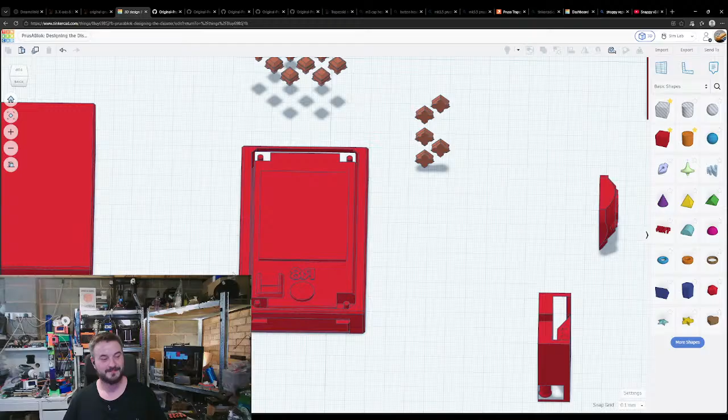Bro's building the PrusABlok castle. I don't need to build the PrusABlok castle - the PrusABlok castle already exists. That is called Printer Quest, that is the tabletop game version, a tabletop game made out of PrusABlok. There you go. Minis on one side, Delta in the middle, the other mini on the other end. Yeah?

Right. What am I doing wrong? I'm doing things wrong again, and I can't work out what I'm doing wrong because my brain is frazzled because it's warm. My brain's broken, folks, but that's fine. We're going to resort to going to the slicer again because it worked last time.

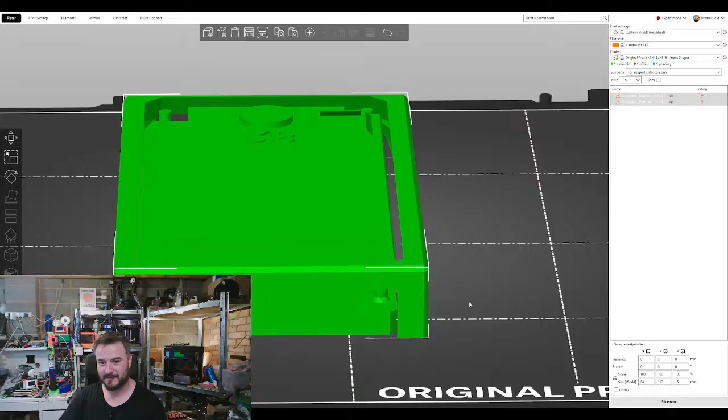Split objects. What's going on? 29 steps ahead, sure, let's get off. Thank you, you go away. Right, now I've got the thing I need for the screen. That took too long, that took too long, far too long.

Right, so we need to go one step higher, so 128. Import, choose a file. Documents, this one, import. Now we've got a mold of the screen essentially. When it imports - come on, it's not that big of an object. I say this, I don't actually know how big it is.

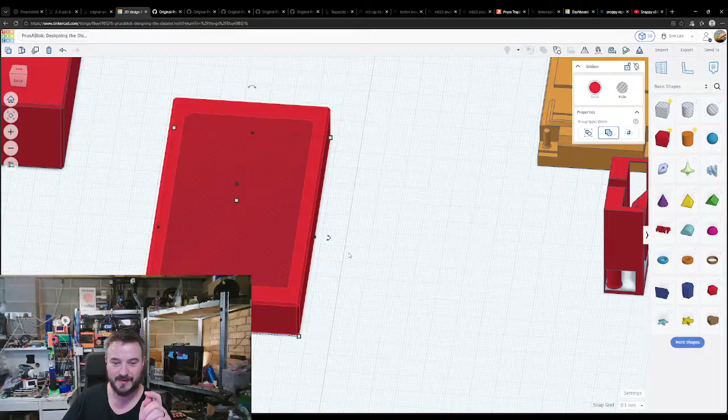Let's actually make this one 16 tall. Screw it, it'll be fine, it'll be fine. And then group. So now we have the cutouts that we need, in theory, for the screen. And then we can take this piece that we stole earlier, that we know is fine. We can plonk it in the right place, recess it a little bit so that it looks in keeping.

This will merge eventually. And when it does...

So we went 128. 128 is how many blocks? I don't remember. But that's fine, because we can go like this. 3, 4, 5, 6, 7, 8. There we go.

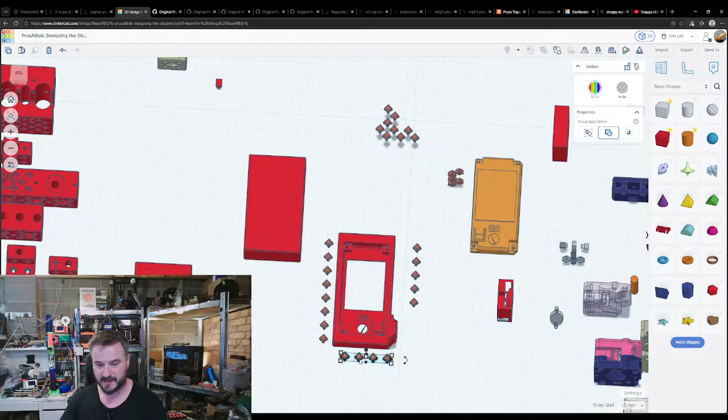And then in theory, we can take a second row, put them at the bottom on the face. So let's do this. Group you together, get off. Group you together. No, I didn't grab all 5. Grab all 5. Rotate. And my lights have turned off.

Let's align you in the middle. Group. Align you in the middle. Align you both in the center and in the middle. And then the same for you up top. Align you in the center and the middle. Drop. Drop. Drop.

And then also, well, for some reason they still didn't group. Drop. Nope. Why aren't you dropping there? Oh, because you grouped there. Silly.

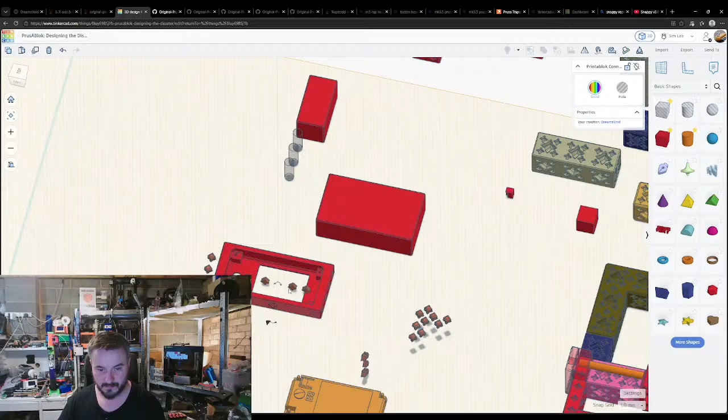Four, and that'll do for now. Right, so we take this batch. We turn it into a hole, make you solid, make you solid. I think we've worked out this trick by now. And then we can group the lot.

So that should cut out this lot. This lot should also cut out. I've no idea if the screen... Yep, the reset button should be fine. The screw hole should be fine, because we stole that. That's okay. The pivot thing looks a bit weird, but it'll do.

So now it's just a case of putting some printer blocks on the front, printer block connector holes on the front. So in theory, if we align those to the edge, we go 1, 2, they should be... or is it 4? 3? They should be in line. Should be.

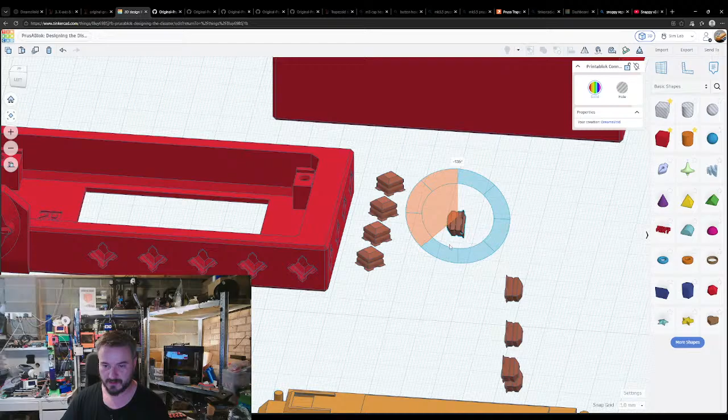I'm not entirely sure what workaround I've got for this. That's a good question. Let's do it this way. Let's make a basic cube. We go 16 by 16 by 16. Well, no, not 16, 64, because that's the size we're dealing with right now.

We align it all with this piece that we are working on, so we align them all in the middle. We then take these, we align center, which we've already done. We can shove that up there for the time being, but then we need to group them together and then drop them into the middle. At which point...

Ungroup, turn the 4 into a hole, drop it to the floor, which is where it's supposed to be, and then realize that, oh wait, you've just aligned it into the middle on that one. So you group it back together, drop it to the face that we're wanting to reference, ungroup, get rid of the piece that we added.

And then we can also go as far as to probably see about getting another row. So let's try another row. Can we duplicate 1, 2, 1, 2, 3, 4, bring that back? How does it look? No is the answer, because it's over the edge. But what about adding a 3?

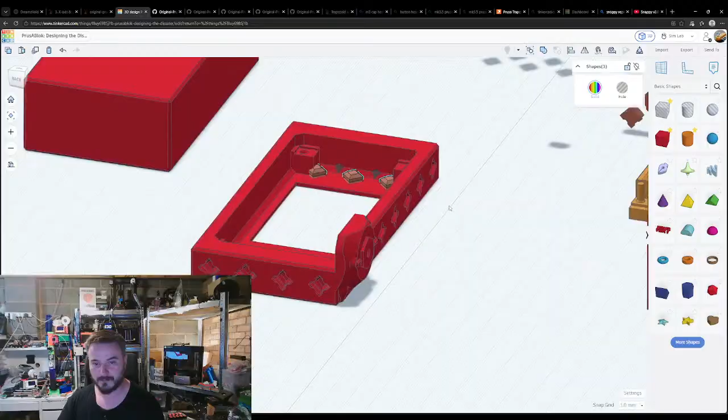How's that? Strange, but fine. They might not be fully functional, but we'll see. No, they won't. They won't be functional at all. That's fine. Group those in there.

Can we do the same on the base? Maybe. Maybe. Let's grab another set and do the same again.

We need it 64 wide. We need it 16 deep. And 16 for good measure on the height, because I like to keep things how they're supposed to be.

Drop, hole, group, align with the reference piece that we're using. Shove the reference piece in the sky. Group them together. Drop it to the face that we're wanting to reference. And then drop it back where we're also wanting to reference.

Ungroup. How do those connectors look? They look fine. So we can keep those and merge them in. That is a screen assembly. It's a weird screen assembly, but it's a screen assembly nonetheless.

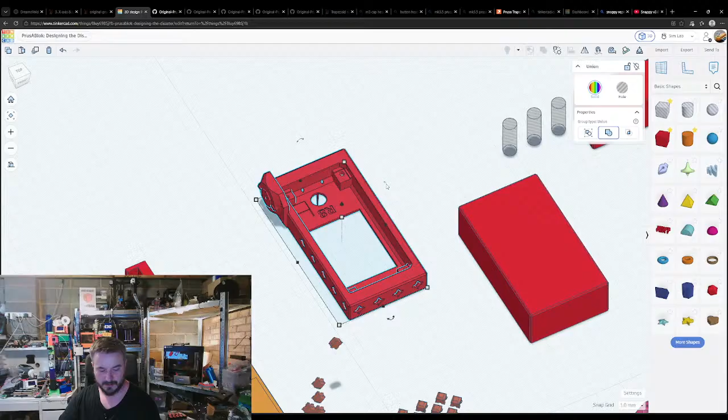So if we rotate, grab our alignment jig - I say alignment jig, our screen holder piece and our screen - we can bring them to the front of the Prusa Mini model, the PrusABlok model. So now we can rotate, and that could go here.

And then our screen somehow joins it using the stock mounting piece. And there we go. PrusABlok. Ta-da! That's the screen. That's the screen on there.

So Tuesday is the electronics enclosure. This is brilliant.

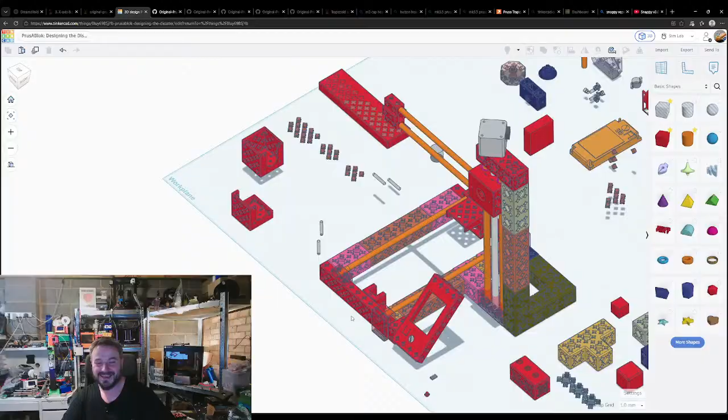Dude. It's dark in here because the lights turned off. There you go, lights.

That looks like a Prusa Mini. Or a cantilever. But that's the PrusABlok. Come on, come on.

If you've been holding out for a while, I mean, that's probably like-worthy, right? You know? That's great. That's actually great. I'm happy with that.

I mean, yeah, we've still got to make the box that holds the main board and put a lid on it. But that's small potatoes at this point. We've done the tricky stuff.

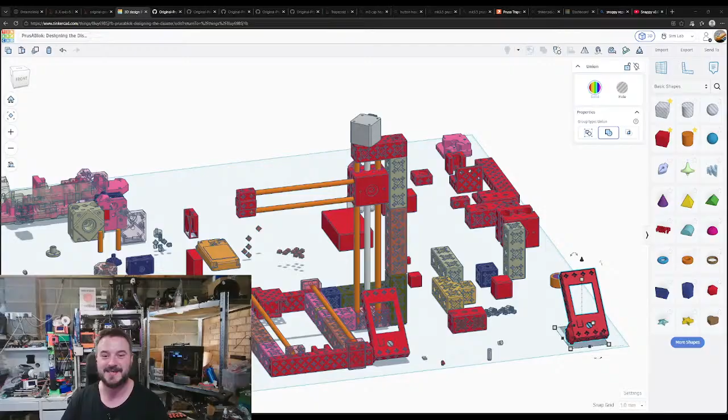Relatively. Shut up. Shut up, this is good. I don't care, I don't care. I'm happy with this. I'm actually happy with this. This is something.

Like we've got our extruder, weird piece. We've got our extruder, right? We've got our screen with the weirdness that is the screen adapter piece, whatever. We've got it, right? The next bit is just the electronics enclosure. Like, that's it.

No, I'm laughing at how modest that was. It's very high. Well, thank you. Thank you.

So, you know what? I think with how hot it is in here, that I would like to call it for tonight. It's been a quiet night, but hey, quiet nights happen. But we've had a very productive night because Herzl's not been distracting us constantly. So, you know, we can blame Herzl.

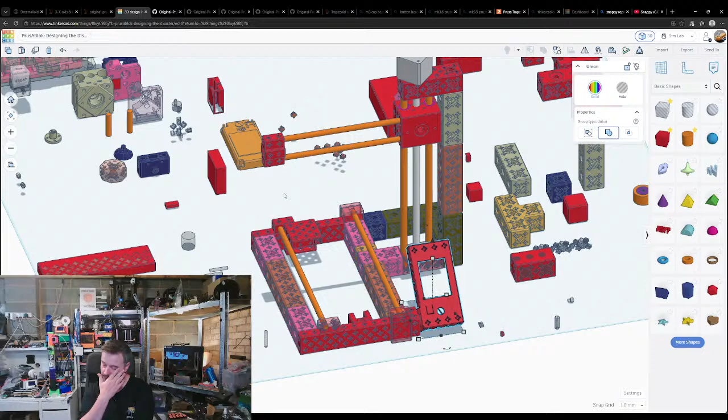This, like, legitimately, right? It would not be too far removed, with the assembly that we've got here, to go to the i3 style. It would not be too far to go i3 with a build like this, I should say. And then following on from that, to take the Prusa Mini core components to then go to a Core XY or a Cartesian H-Bot style.

Like this is what I love about PrusABlok. Because we've now got these components that we've created here, and now we can go wherever we want to with it. Because we've got the frame, we've got the motion components now made, we've got the screen holder made. How many panels this is going to take to reinforce it, who knows? But we'll figure that out. And that is the joys of this, because that's the joys. That is what PrusABlok to me is about. Being able to take it, remix it, and make something new.

It's ridiculous. It's great. It's me yawning far too much. But hey.